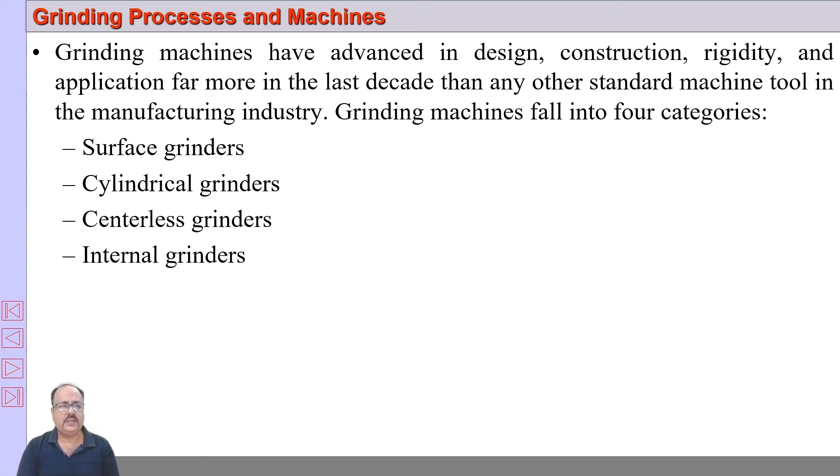So in this lecture we'll be discussing grinding processes, what are the different types of grinding processes. Grinding processes can be of 4 different types, though there are other processes also. The most important types are surface grinding, cylindrical grinding, centerless grinding, and internal grinding. Also there are tool and cutter grinding processes, and creep feed grinding processes. All those we'll be discussing, but these 4 are the important ones industrially.

So what is surface grinding process? Surface grinding process is basically a process of grinding to generate flat surfaces. There are various ways in which we can generate flat surfaces.

In the first example, A, the grinding wheel is rotating about a horizontal axis and the workpiece is reciprocating. In the second case, the grinding wheel also rotates about a horizontal axis, however the workpiece is held on a table, and a number of workpieces on the table are rotated under the wheel. In the third case, C, the grinding wheel is rotating about an axis perpendicular to the workpiece surface, and the workpiece is reciprocating. In case D, a number of workpieces are held and rotating, and the grinding wheel rotates about a vertical axis.

Notice that in the horizontal axis rotation, the cutting edges, the grinding abrasives, are on the periphery of the grinding wheel, whereas in C and D, where the grinding wheel rotates about a vertical axis, the abrasives which remove material from the workpiece are on the face of the grinding wheel.

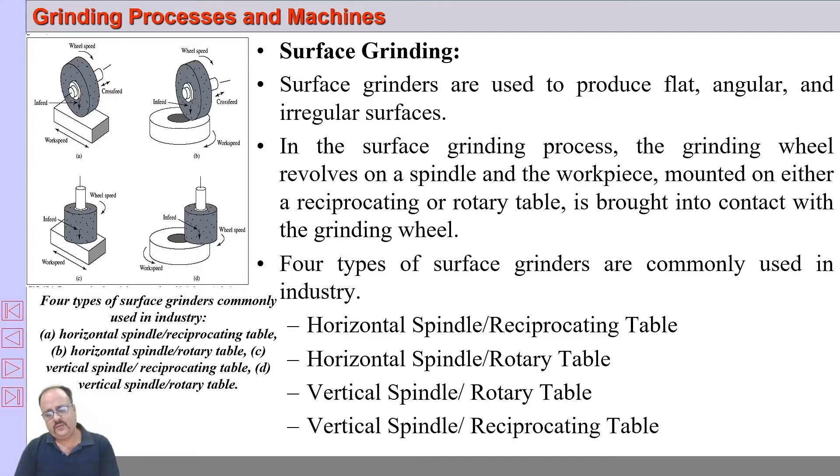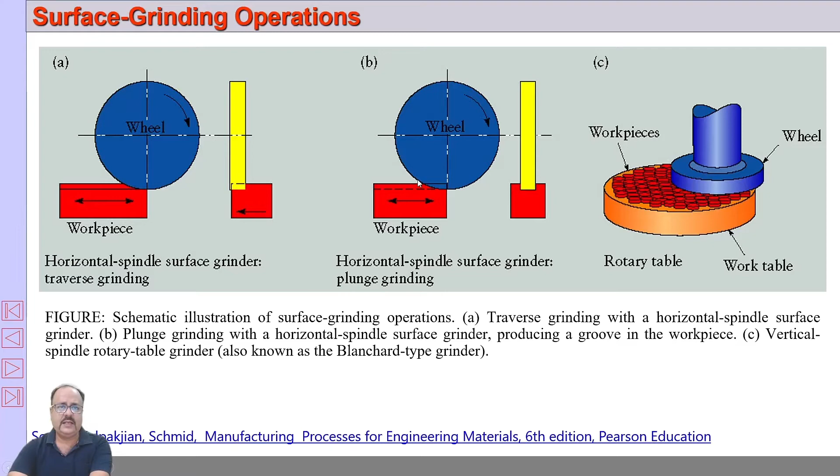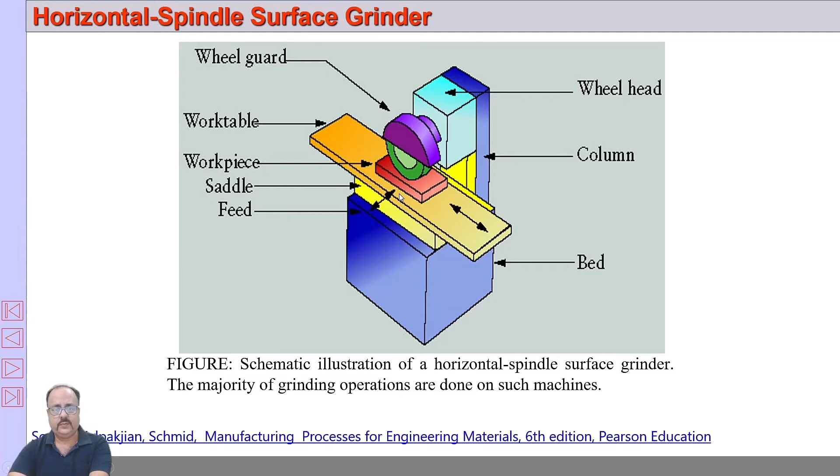Plunge feed I have already discussed. This table is normally an electromagnetic table. The workpiece is held on the electromagnetic table, and this is the wheel. The feed is given to the table, which can move in X and Y direction, and this is rotated about the workpiece. So this is how it works.

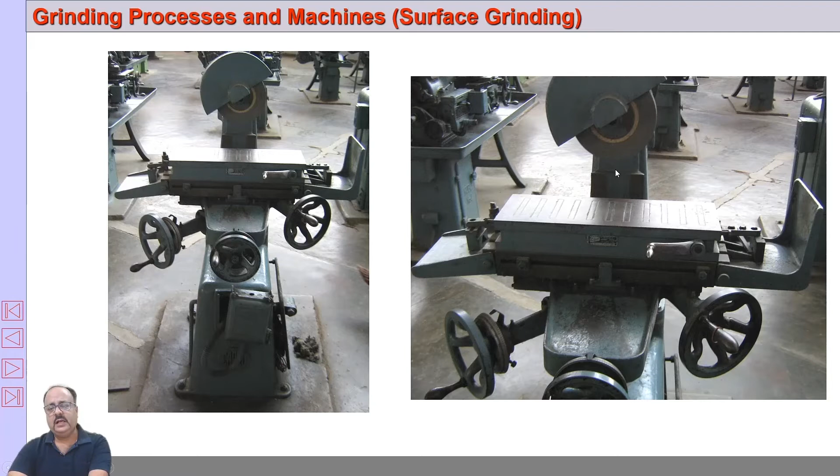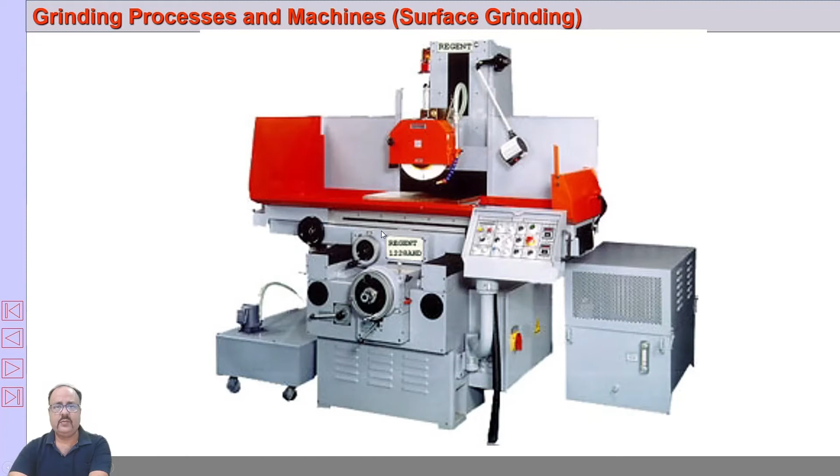So this is the surface grinding machine we have in our lab. This is the electromagnetic table, and this is the grinding wheel, and we can give feed in this direction and this direction. This is a CNC surface grinding machine. We have a CNC surface grinding machine in our shop, but this is not the picture of that. The picture I have not included here.

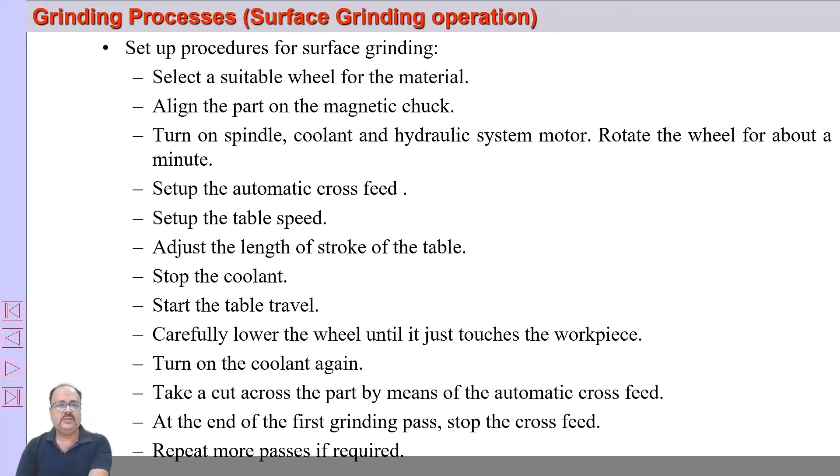Surface grinding process: first you have to select a suitable wheel for the material, then align the part to the magnetic chuck, turn on the spindle, coolant, hydraulic system etc. Set up the automatic cross feed, set up the table speed, adjust the length of the stroke, stop the coolant, start the table travel, carefully lower the wheel until it touches the workpiece, turn on the coolant again, and take a cut across the part by means of automatic cross feed. At the end of the first grinding pass, stop the cross feed, and repeat the process if more passes are required. This is the basic algorithm of a surface grinding process.

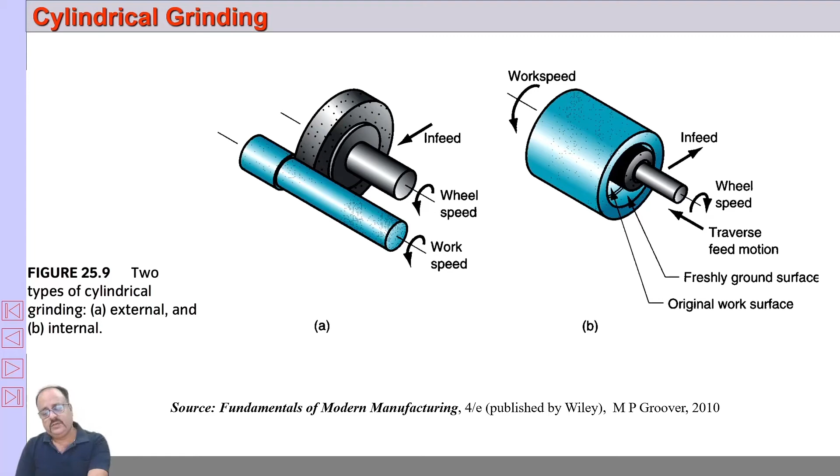It can be done externally and it can be done internally. This is a turning process where it produces cylindrical surfaces. The workpiece is held between centers, and the tool post carrying the single point cutting tool will be replaced by a grinding wheel. The machine looks very similar to a lathe machine.

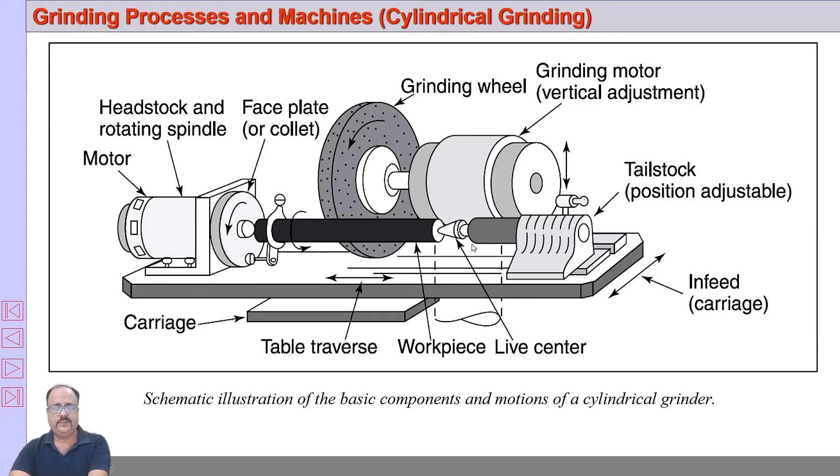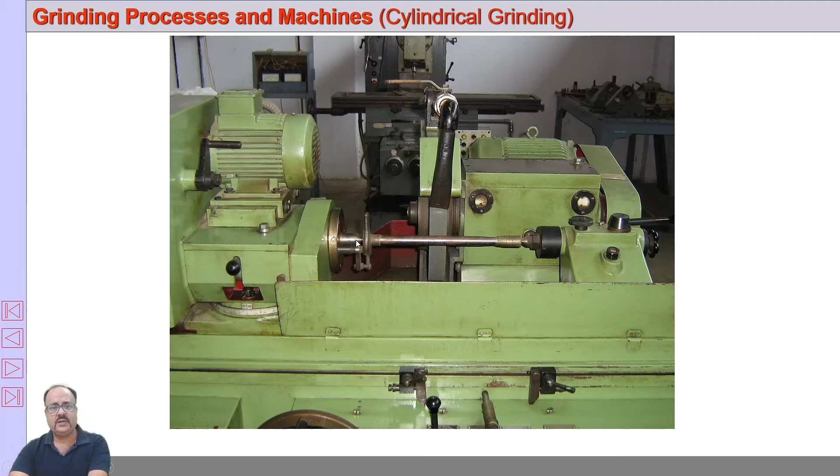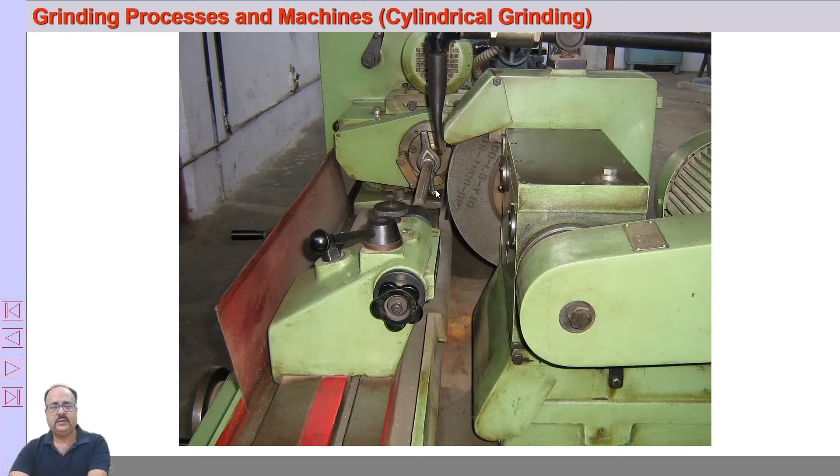This wheel can be moved about the length, cross length. If you move about this cross length, it is called traverse feed cylindrical grinding, and if instead the feed is given in this direction, then we call it plunge cut or plunge feed. This is similar to surface grinding also. We do this in surface grinding also.

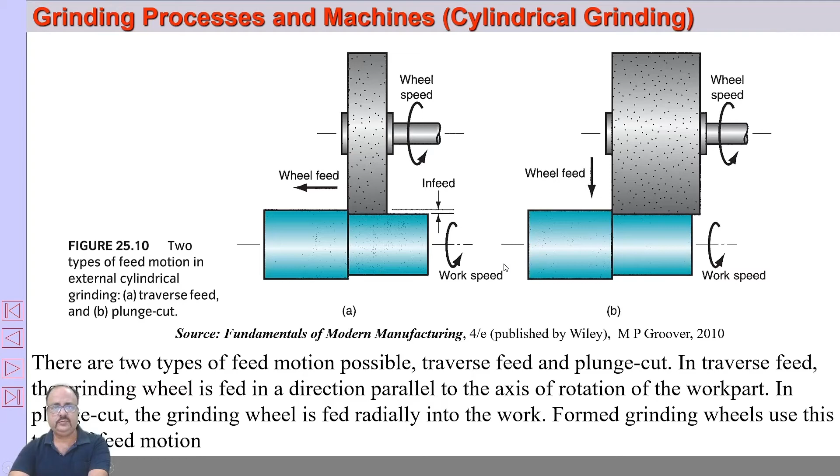And then we have centerless grinding. In centerless grinding, basically we do not use centers, therefore it is called centerless grinding. Unlike the cylindrical grinding process, here we do not use centers. We just place the workpiece between the two wheels. One is the grinding wheel, the other is the driving wheel.

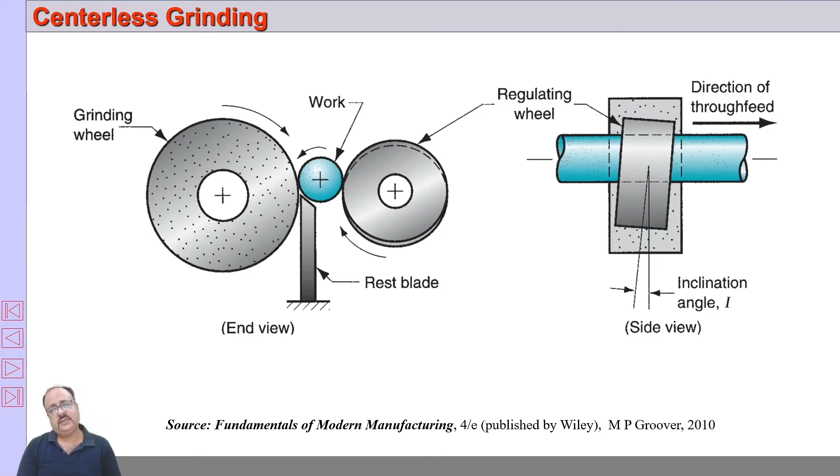Again, it can be external cylindrical grinding, and it can be internal cylindrical grinding also. You can see here, this is the regulating wheel, slightly tilted for throughfeed. So this is internal centerless grinding. Two support rolls, this is the grinding wheel and this is the regulating wheel. It will move in this direction.

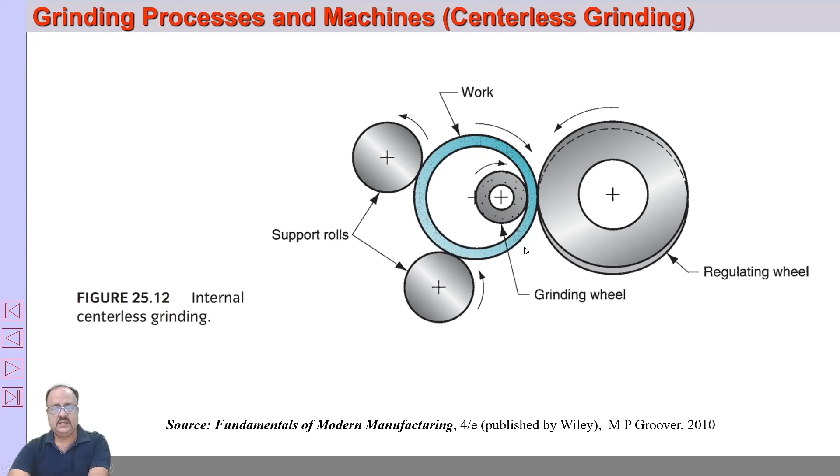CNC centerless grinding machines are also available. There are three types: through feed type, plunge grinding, and end feed type also. In through feed type, it will move in this direction. In plunge feed, it will move radially. This is normally used for grinding bolts, etc., which creates problems in moving in transverse direction.

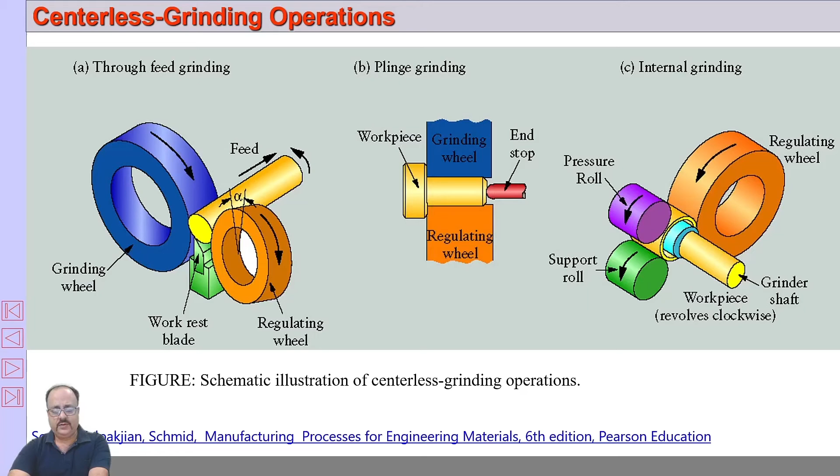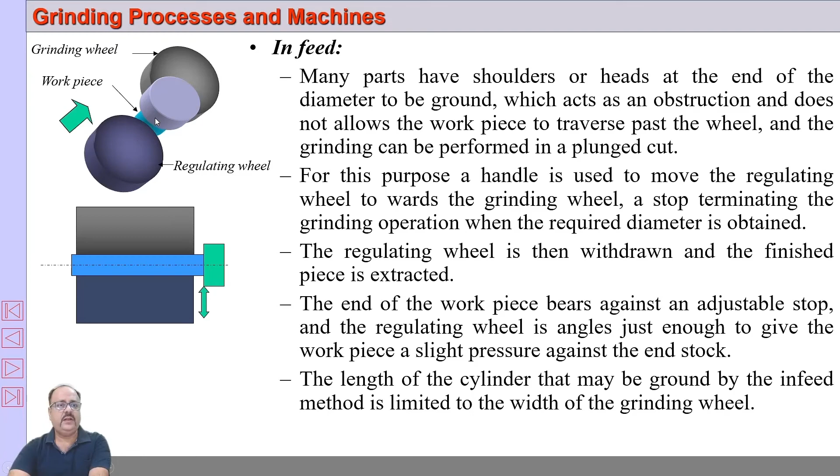And there is end feed. This is mainly used for tapered cylindrical grinding workpieces. So through feed - this is the through feed, this is the end feed, and this is in feed or plunge feed. The feed is given in this direction, and this is a tapered feed. So this is end feed. In end feed, there is a stopper, and the grinding wheel is rotated, and the workpiece moves and stops at a particular point. This is particularly used for taper workpieces.

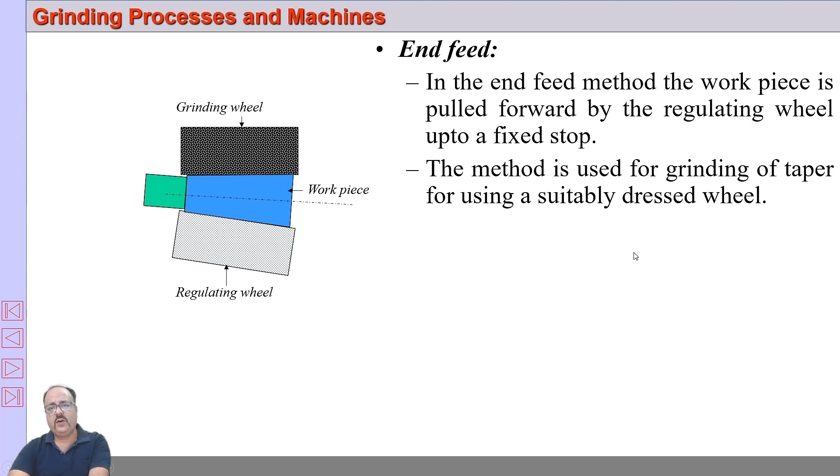There are other types of grinding processes also. These are the centerless grinders - advantages of centerless grinding, limitations. Internal grinding is also important. It can be cylindrical internal grinding, and it can be centerless internal grinding also.

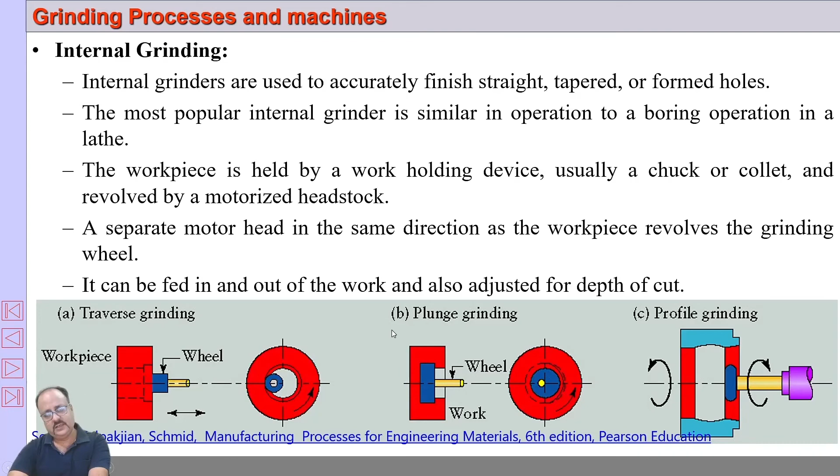And then we have creep feed grinding. It's a new form of grinding invented around 1958. Creep feed is performed where high depths of cut and very low feed rates are required, hence the name creep feed. A large volume of material is removed here, and the depth of cut may go up to around 6 mm. This is extremely high, although 1 mm, 2 mm are easily cut in centerless grinding.

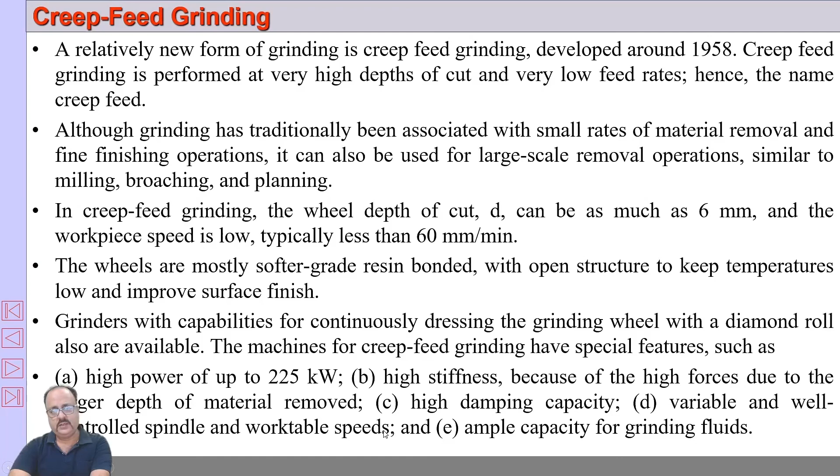Normally we do not perform creep feed grinding in a conventional grinding machine. Rather, we require a special form of grinding machine which has higher power and higher stiffness and damping capacity, and variable and well controlled spindle and work table speeds. So that is required for creep feed grinding.

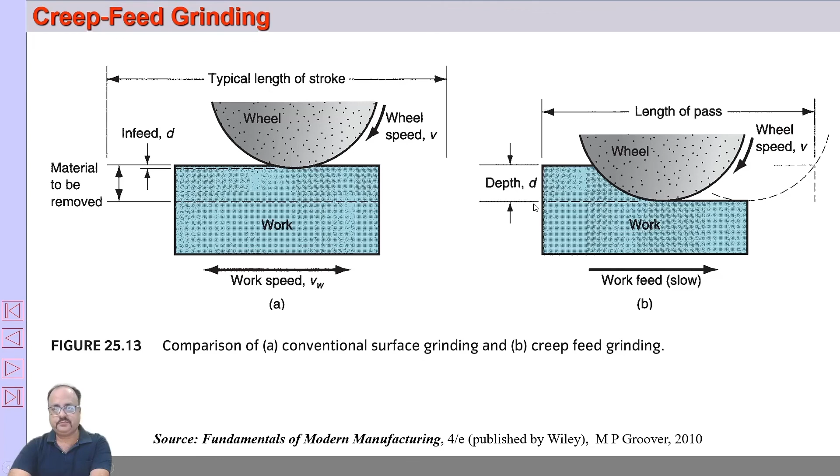So this is a conventional grinding process. Small volume of material is removed, and you can see the depth of cut here is very small, and here you can see the depth of cut is very large. Although it is exaggerated, the depth of cuts are quite large in creep feed grinding, and this is 1 to 6 mm, the size that varies for creep feed grinding.